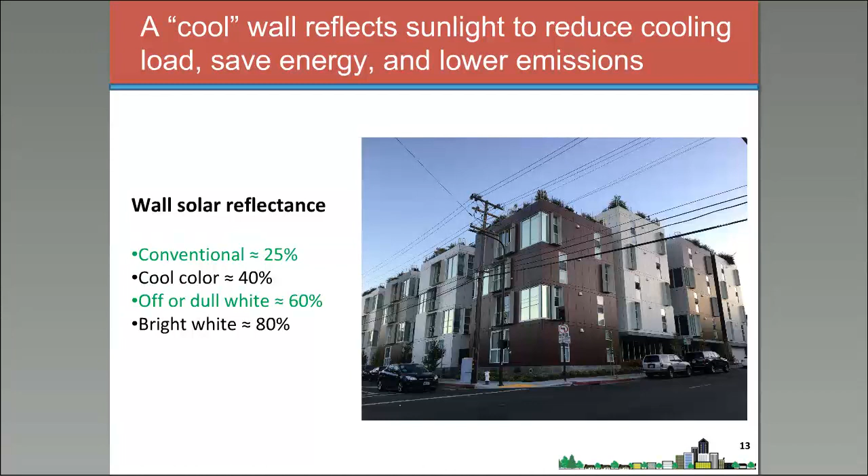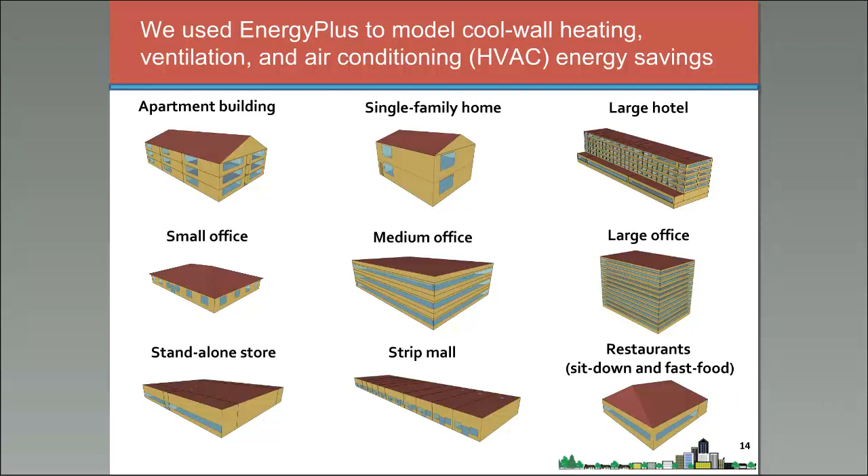We modeled the heating, ventilation, and air conditioning (HVAC) energy savings that could be attained by upgrading to a cool wall from a conventional wall using the building simulation tool EnergyPlus. We considered 10 different building categories, including homes—single family or multifamily—offices of different sizes, stores, standalone and in strip malls, and a couple of flavors of restaurants.

Using EnergyPlus, we evaluated the annual energy use, energy cost, and emission reductions attainable in each climate zone in California and across the United States. California is divided into 16 climate zones, and we considered 15 climate zones around the country. Here are little maps showing what these zones are.

What we found is that using cool walls will save energy and reduce CO2 emissions in homes, offices, and stores in all California climates and in U.S. climate zones 1 through 4.

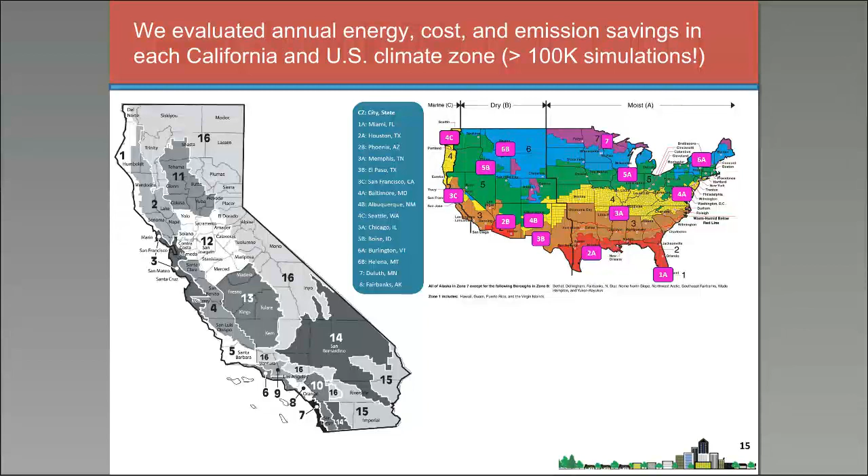Here's an example for a single-family home in Houston. I chose Houston because it's neither the hottest nor the coolest place where one would expect to see cool wall savings based on the previous simulations.

On the plot, I'm showing both the annual HVAC energy cost savings—that's heating, ventilation, and air conditioning, considering what happens across the entire year—and also the annual HVAC CO2 savings.

If you have a single-family home in Houston, Texas, and it's new construction, conforming with the 2012 energy efficiency standards, the latest in effect in Texas, then you would save about $58 a year.

If you had an older home built in the 1980s, according to the standards in effect at that time, you would save $74 a year. And if you had a home built before 1980, the oldest vintage, you're saving $129 a year.

That's a theme we see throughout the simulations done across California and the United States: savings in these pre-1980 homes are typically over twice that in new homes. That's because the older homes simply don't have as much insulation.

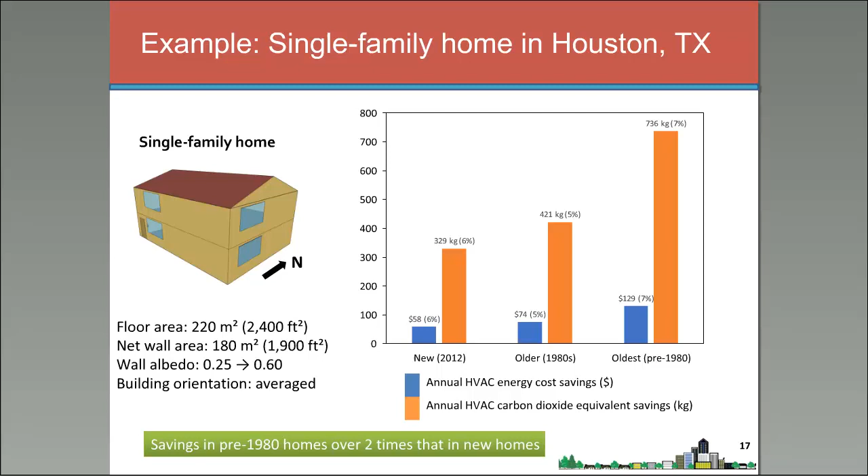This is important because if you look at the median year of construction of residential or commercial buildings in California or across the United States, it's in the 1970s, meaning over half of the buildings in our country were built before 1980, before the advent of modern building energy efficiency standards.

Now I'm going to address a few questions that might have come to mind. The first is: what if it's a wall that I'm making cool, but perhaps my wall is shaded, so it wasn't in full sun? How does that affect the savings I would attain?

You can scale the savings shown in the previous slides by what I call a solar availability factor. This is the ratio of the sunlight that strikes a wall, after considering the effect of neighboring buildings, to the sunlight that would be incident on the wall if the building were isolated.

Here's an example: if I have a single-family home—that's the central building shown in red—and it has neighbors.

It has a neighbor to the east across the street, a neighbor to the west across a pair of backyards, and neighbors to the north and south across narrow side yards.

What I do is look at the ratio of the height of these buildings to the separation between them, which yields what we call an aspect ratio. I've drawn some aspect ratios at the bottom of the slide in the lower left corner.

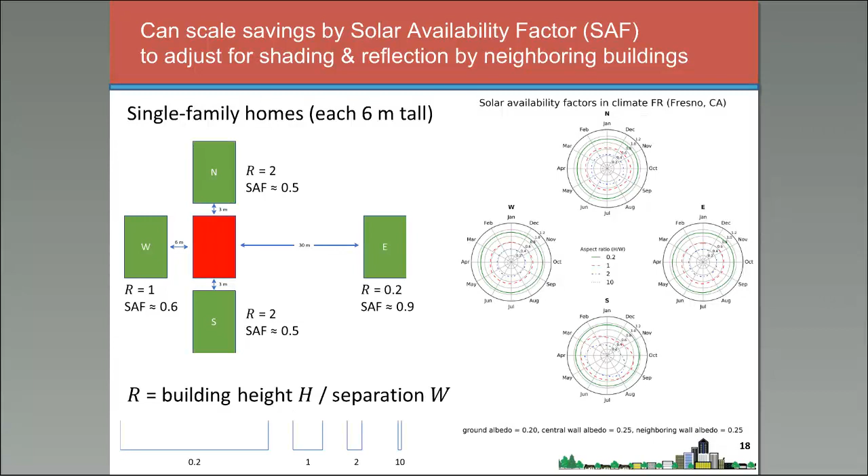The aspect ratio would be 0.2 for the building far to the east, 1 for the building closer to the west, and 2 for the buildings quite close to the north and south. I can then evaluate, based on the location of the building—for example, this building here in Fresno, California—and the month of year, the solar availability factor. My multipliers in this case are 0.9 for the east building, 0.6 for the west building, and 0.5 for the north and south buildings.

Another question you might ask is, can I get a cool wall product today? And the answer is yes. Here I'm showing measurements we have made on a variety of wall products that we're testing outdoors. I'll arbitrarily say a lower tier cool wall is one that reflects at least 40% and less than 60% of sunlight, and a higher tier cool wall reflects in excess of 60%. You can see there are products in perfectly acceptable colors sold today.

I'll also quickly mention that the group on top are all made with conventional pigments—ordinary things you'd find sold in, say, a paint store. The ones on the bottom use spectrally selective pigments, a slightly more advanced technology, but one that's been used for roofing materials commercially for decades, and in certain applications since the 1950s.

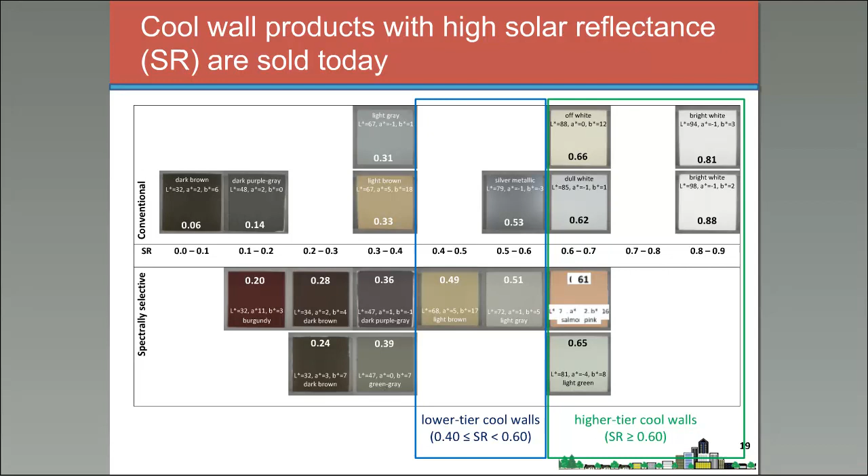A final question you might ask is: since we know roof products tend to get dirty and become less reflective over time, what happens to wall products? We'd like to know the answer too, so we've been conducting campaigns of product exposure.

We've been exposing products at 3 sites across California and at another 3 sites across the United States. We have roughly 50 to 70 products being exposed in each campaign, for 2 years across California and for 5 years at the U.S. sites. The California campaign will conclude this spring, and the U.S. campaign has about another 3.5 years to go.

Here's what we've learned so far. If you take a wall product and expose it vertically in Berkeley, Los Angeles, or Fresno, or take similar products and expose them vertically in Arizona, Florida, or Ohio, at most—after 15 months in California or 12 months in the U.S.—the reflectance has decreased by 5 points out of a maximum possible 100. That's a pretty modest loss.

If we were talking about roofing products instead, over a similar time period, the reflectance loss might be 10 to 20 points. Furthermore, the really high reflectance losses are observed only for materials that were bright white to begin with. For a dull white material, whose initial solar reflectance might be around 60%, those losses are perhaps 2 to 3 points. In short, wall products so far do not appear to get particularly dirty.

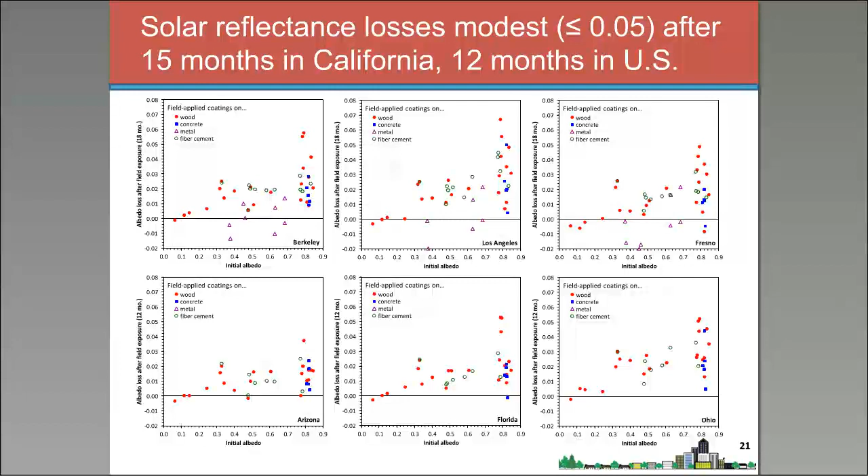So if you installed a cool wall product that had a high solar reflectance to begin with, it's likely to retain that high solar reflectance. And that's my introduction to cool walls and the energy saving and greenhouse gas reduction benefits.

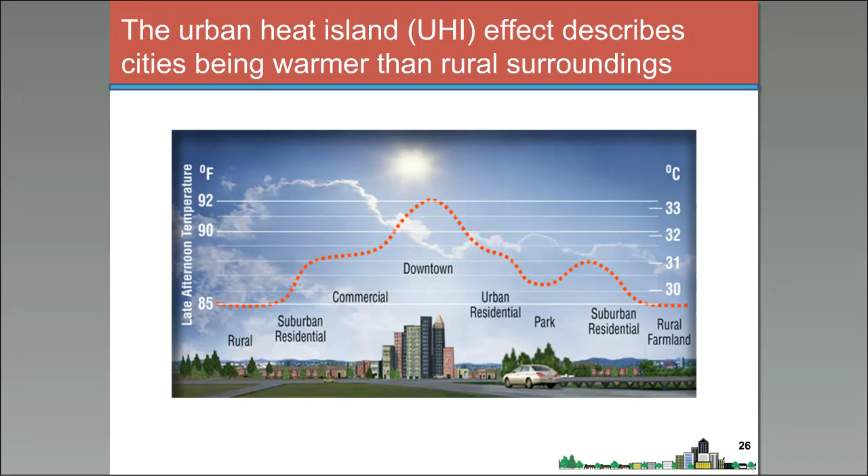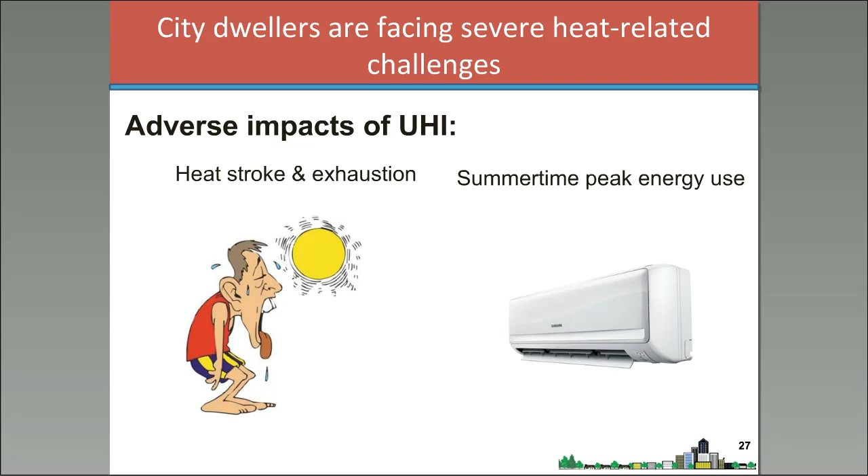Everybody on this call knows what the urban heat island is, but I'll spend 10 seconds defining it just in case. The urban heat island is a phenomenon describing where cities are warmer than their rural surroundings, and it causes various heat-related challenges including heat stroke and exhaustion, increases in summertime energy use, air pollution issues, and more.

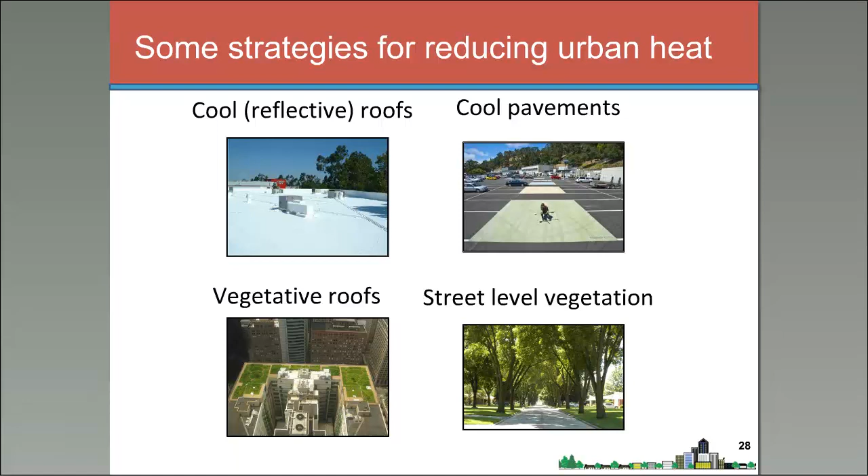Cities are considering various options for reducing urban heat islands, including solar reflective cool roofs, cool pavements, and vegetation at roof level and street level. As already mentioned, solar reflective cool walls are a topic that hasn't been studied as extensively as the others. I'm going to talk quite a bit about solar reflectance and albedo, which in this context I'm using to mean the same thing, so I'll quickly define it.

The albedo we're defining here as the ratio of reflected to incident sunlight. So the highest albedo attainable would be 1, meaning reflecting all incoming sunlight, and the lowest would be an albedo of 0, meaning absorbing all incoming sunlight. These have not yet been systematically investigated, so that's what we're doing in this work.

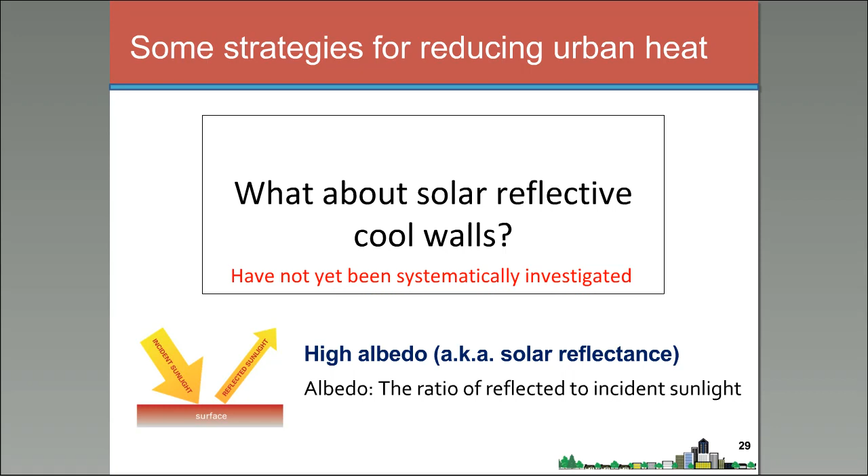Our research goals were to quantify the climate effects of hypothetical widespread cool wall adoption in the Los Angeles basin - basically trying to bound the maximum possible impact of cool walls, assuming all buildings adopt them. We look at increases in reflected sunlight out of the city of LA after adopting cool walls, and the consequent air temperature reductions in urban canyons. We thought this would be a nice opportunity to compare the climate effects of cool walls to cool roofs using a consistent modeling framework, so that's part of this work too.

To do this, we use a modified version of a regional climate model called WRF, the Weather Research and Forecasting Model. We made various modifications to the model to investigate this problem more accurately, which I don't have time to go into. The model includes formulations to account for the effects of urban canyons on radiation transfer, for example the way buildings shade the ground and the way sunlight can get trapped in urban canyons. Urban canyons are basically the space between buildings, that U-shaped cavity between buildings.

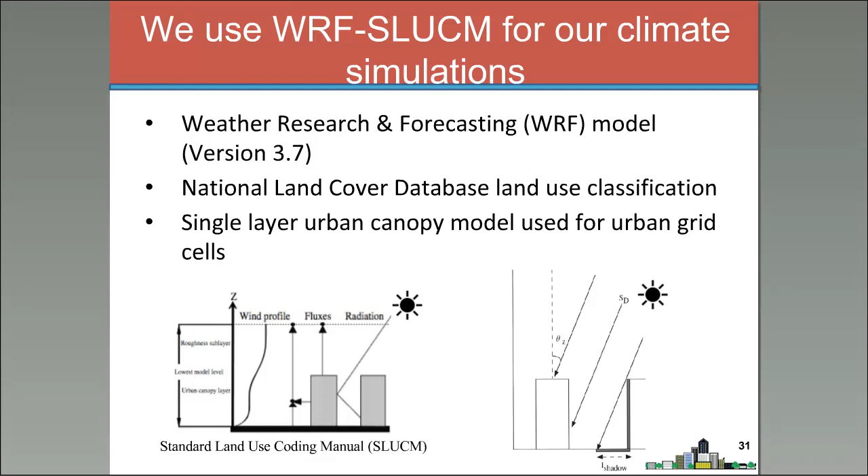So for this investigation, the modeling we did was focusing on Southern California. You can see the figure on the left, the red square there is our highest resolution nested domain for the modeling.

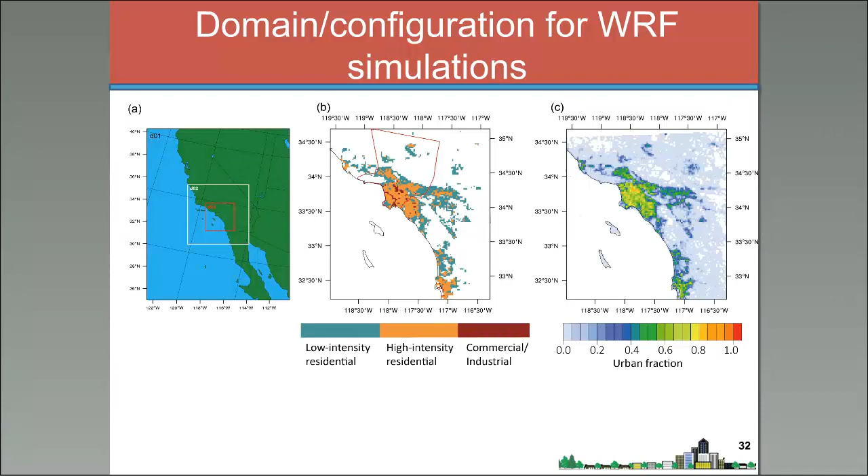It was simulated at 2 kilometers, and as you telescope out to the larger areas, those are simulated at lower resolution. In the middle and right figures, you can see a couple of the data sets we use to describe the variations in land cover in the Los Angeles basin, essentially looking at the fraction of surfaces in the urban area that are impervious surfaces as opposed to pervious vegetative surfaces and soil surfaces.

One thing that was very important for this project, to accurately quantify the effects of cool walls, was to get a realistic sense of the urban morphology, so basically looking at building heights, wall areas, the width of urban canyons, meaning the space between buildings, and things like that.

To do so, we used a data set called LARIAC, the Los Angeles Region Imagery Acquisition Consortium. It's basically a highly accurate three-dimensional building footprint data set that shows footprints and height for each building. We also used another street centerline data set, and we're able to characterize the morphology or geometry of various buildings around the basin.

So we did a bunch of different scenarios. The first one is a control scenario where we assume low albedo for walls and roofs, and the idea here is to look at the sensitivity of the climate of the LA basin to increases in wall albedo. We can then use those sensitivities to scale our results to whatever wall albedo increase is of interest.

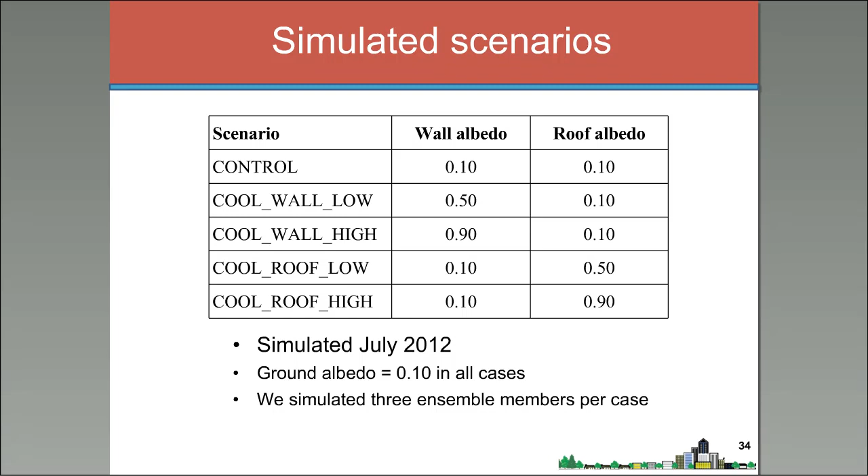We did simulations for cool roofs with equivalent albedo increases to be able to compare and contrast the climate impacts of those things. The results we're looking at are for summer, July of 2012, so we're basically modeling the climate as it was for July 2012, and then doing perturbation scenarios where we see, okay, what if July 2012 was the same, but all walls had an albedo of 0.5, and in an extreme case, to completely bound the system, what if all walls had extremely high albedo of 0.9, etc.

The basic point here is to show that walls are unique because they're vertical surfaces, so you get larger albedo increases in the morning and in the evening. It has to do with the way the sun is lower, and the sun sees more wall in the morning than it does when the sun is overhead.

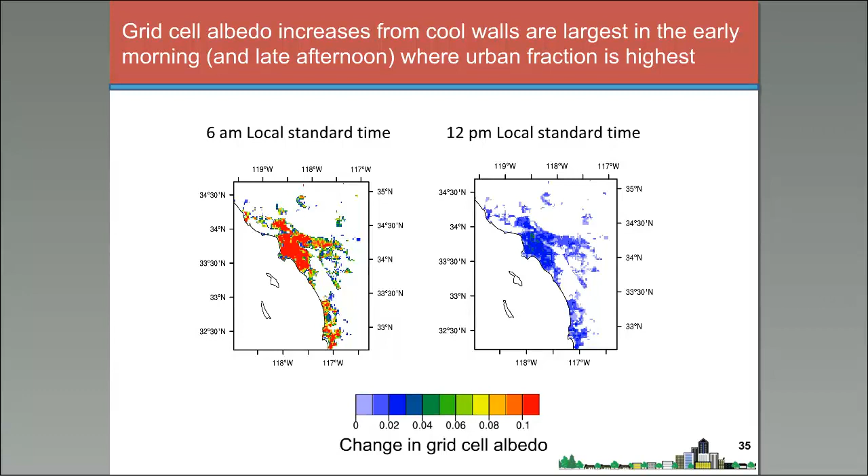At noon, and so you can see the figure on the left for 6 a.m. has more red colors, which means a larger bird's eye view albedo increase in the morning and in the evening, although that's not shown. This figure here shows the diurnal cycle, basically the evolution of albedo increase throughout the day.

For the two cool wall adoption scenarios we looked at, we're comparing it to cool roof scenarios, which are the two green lines. Because roofs are horizontal surfaces, the bird's eye view increase from cool roofs is constant throughout the day, whereas for walls, there's this diurnal cycle.

Again, you can see when you look at the blue lines that the albedo increase from the bird's eye view is higher in the morning and in the evening. You can see that for a constant albedo increase, compare, for example, the solid blue line to the solid green line, those are the same albedo increases for roofs and walls. In the early morning and late afternoon, the blue line is higher than the green line, so the bird's eye view albedo increase is larger for cool walls than for cool roofs.

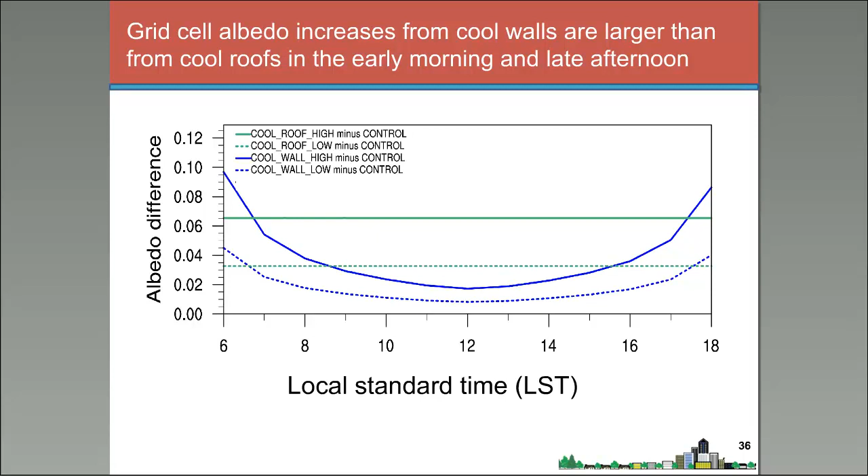But then for most of the day, the albedo increase from the bird's eye view is larger for cool roofs than for cool walls.

What really controls the climate impacts are a few things listed here. One has to do with how much sunlight ends up being reflected out of the urban area. For walls, this introduces a new complication, because sunlight reflected from walls doesn't necessarily make it out of the urban canyon like it does for roofs.

With roofs as a horizontal surface, almost all the reflected sunlight makes it out of the urban system. For walls, roughly half of the sunlight gets absorbed within the urban canopy itself. So to think through how cool walls affect climate, we need to consider that solar irradiance on walls is about 40% of that on roofs for July in LA County, because walls are vertical rather than horizontal.

But on the other hand, there's actually more wall area than roof area. The net wall area is about 60% larger than that for roof area.

The third point is that solar radiation reflected by walls is partially absorbed by opposing walls and pavements. So if you think about the daily cumulative increase in sunlight reflected out of the urban area, cool walls don't have as high a daily cumulative increase. At the bottom, for the cool wall high scenario, there's about 780 kilojoules per meter squared that makes it out of the urban area, which is about 43% of that for cool roofs. So a portion of it gets trapped in the urban area.

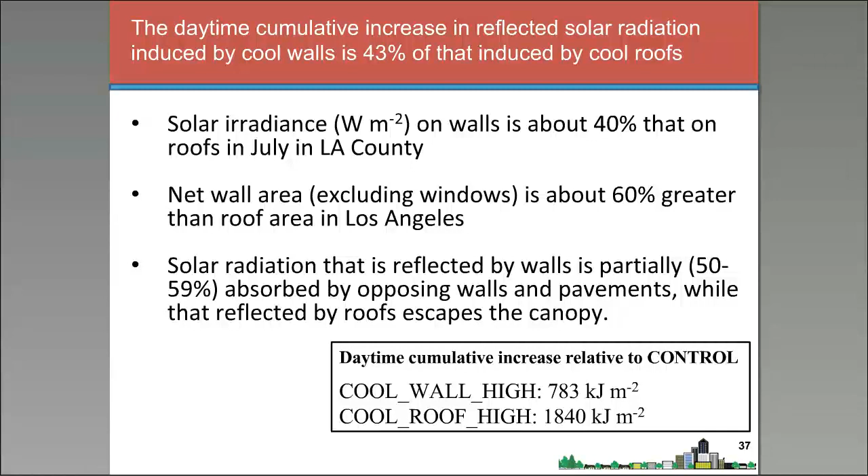When you look at the climate impacts, this shows the change in canyon air temperature, a new diagnostic variable for this model, which looks at air temperature within the canyon rather than at the top. What you can see here is the temperature change caused by cool wall adoption at two times a day: in the afternoon, roughly the hottest time of day, and in the evening, when many cities have their maximum urban heat island effect. You can see temperature reductions up to roughly half a degree Kelvin or Celsius.

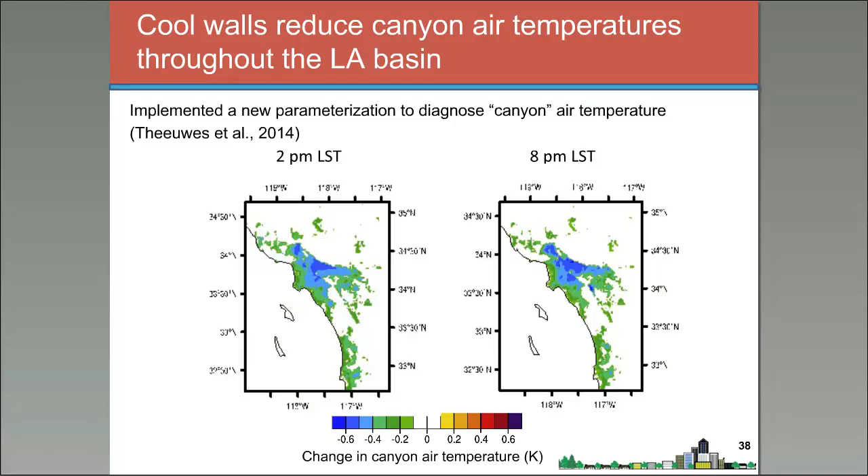As you move to the east side of the basin, you get more cooling. That relates to the onshore sea breeze in the LA basin, so the climate impacts of cool walls accumulate as you move east, as the winds move air from west to east.

This figure compares cool roofs to cool walls. First look at the solid blue line, for the maximum case of really high albedo cool walls. You can see there are two peaks in temperature reduction: the first at 9 a.m. and the second at 1800 hours, or 6 p.m. That shape of the diurnal cycle is somewhat complex, and I don't have time to go into it fully.

It has to do with the diurnal cycle in the amount of radiation a wall sees, which is higher in the morning and evening than at noon. It also relates to some atmospheric dynamics I won't get into right now. If you compare that to the solid green line, the climate impact of adopting cool roofs with the same albedo increase, you can see the peak temperature reduction is a bit larger than for cool walls, and it comes a little later in the day.

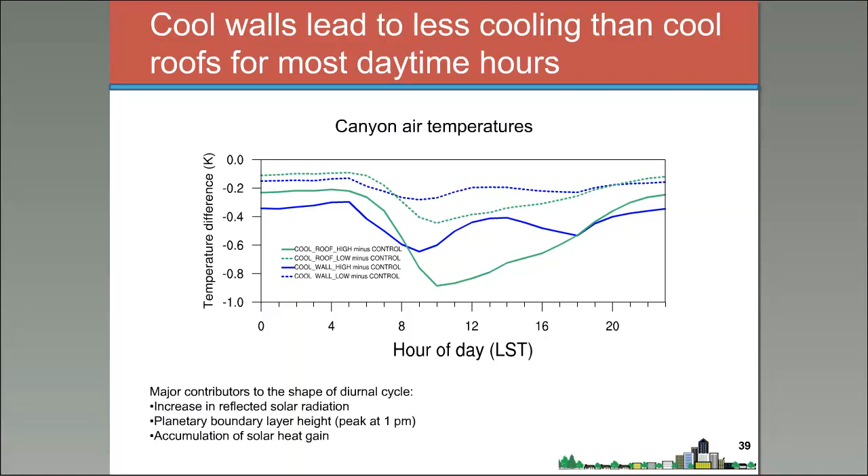This table summarizes daily average temperature reduction per facet albedo increase. The takeaway is that daily average temperature reductions are pretty similar for cool walls and cool roofs. As an example, look at the second and fourth rows, comparing the climate impacts of really high albedo cool walls and really high albedo cool roofs. Per 0.1 albedo increase, the temperature reductions are relatively similar.

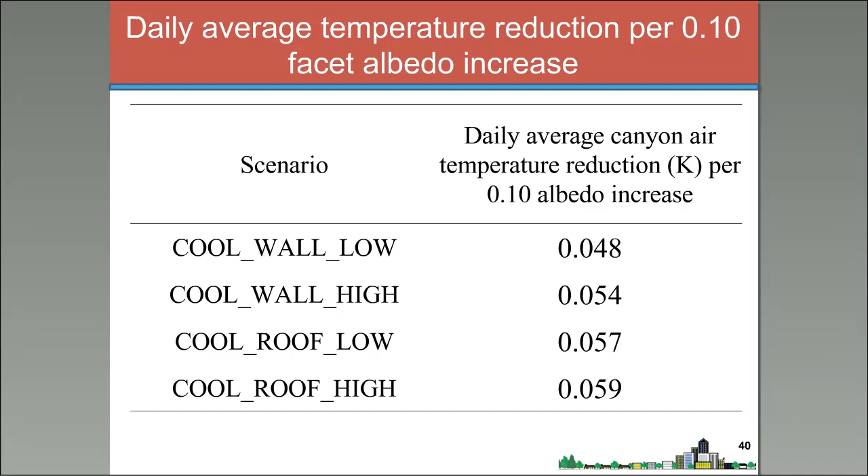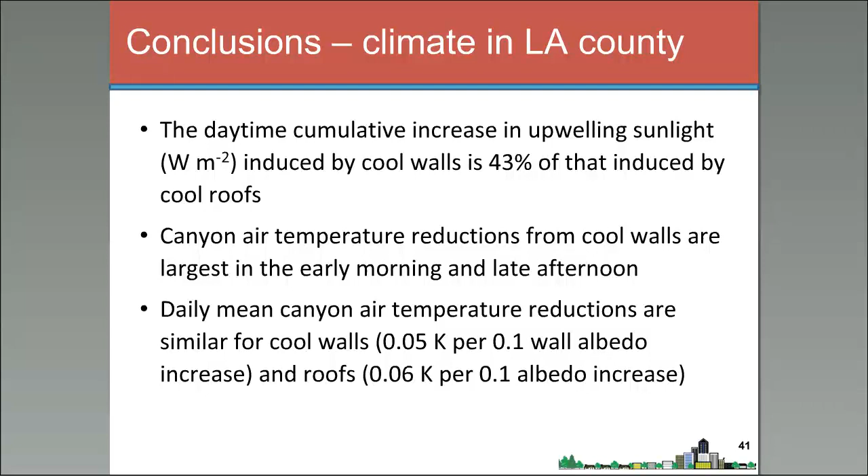0.05 versus 0.059. So in conclusion, we found that daytime cumulative increase in upwelling sunlight induced by cool walls is about 43% of that of cool roofs. Canyon air temperature reductions from cool walls are largest in the early morning and late afternoon. Daily mean canyon air temperature reductions are similar for cool walls and cool roofs when viewed from a per facet albedo increase perspective.

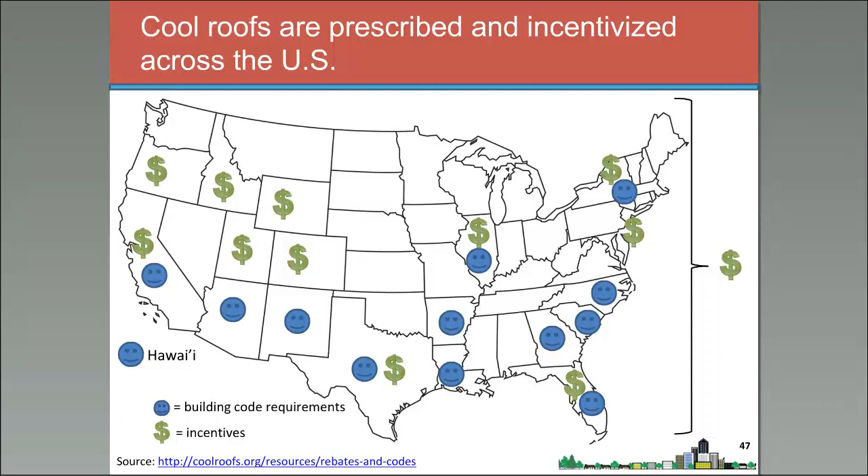Based on that poll, it seems like many of you are familiar with cool roofs, and many of you have actually taken steps to implement or adopt cool roofs in your jurisdiction. That is similar to what we found when we look at cool roofs across the U.S. We find them prescribed and incentivized across the U.S. in many states and cities, and that's kind of what this graphic is demonstrating. And so the cool roof model has been very successful.

So when we thought about how to advance the adoption of cool walls, we thought, let's replicate this cool roof model. To do that, we set out to do a couple of things. One is to create some guidelines to help building owners and communities understand the appropriate adoption and implementation of cool walls, as Ronnen kind of outlined in his initial presentation. What are the benefits? We also wanted to look to develop language for building codes, green building programs, and incentives, which can help further the adoption, and also investigate the feasibility of a cool wall rating program or system.

Cool walls, it was kind of exciting to find, are actually referenced already in many codes, standards, and green building programs. I bet many of you are familiar or have heard of ASHRAE. There's ASHRAE 90.1, which is a standard for non-residential buildings; we find cool wall measures in ASHRAE 90.1. We also find them in ASHRAE's 189.1, which is the green building standard that they have developed.

We also find cool wall measures in California's Green Building Code. They have a set of measures that are mandatory, and then they have a set of voluntary measures, which includes cool walls that local jurisdictions can adopt to go beyond code. And that's where we find cool walls. We also found them in the state of Hawaii, and we'll hear more from Howard about that later, and also in the National Green Building Rating Program, Green Globes.

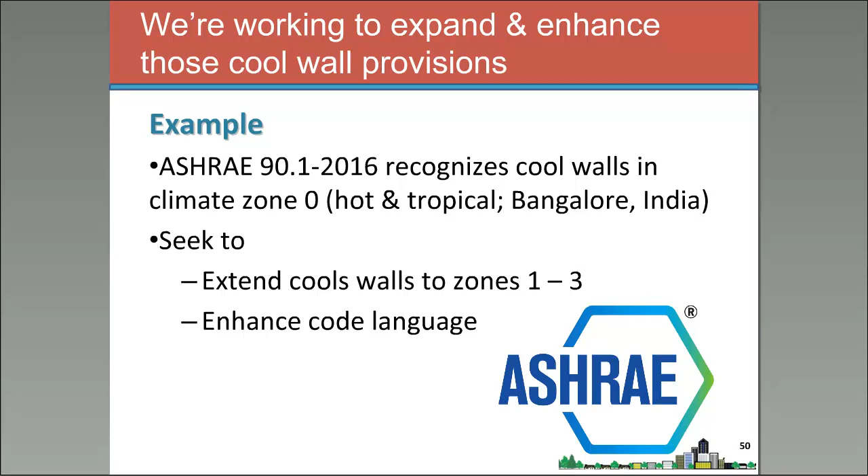While we found cool wall measures in many different existing building codes and standards, there are still other key programs we're trying to introduce cool wall measures into, such as the U.S. Green Building Council's LEED program. Dr. Levinson is working on submitting a pilot credit for LEED, under the Heat Island Reduction Credit.

We're also working with the California Energy Commission to see if we can introduce cool wall measures into the Building Energy Efficiency Standards, commonly referred to in California as Title 24. And it's also important to target residential buildings. While ASHRAE 90.1 is widely used and adopted, it's for non-residential buildings. So we hope to also work with IECC to include cool wall measures, which would be helpful for increasing adoption in the residential market.

In addition to these building codes and standards and mandatory avenues for advancing adoption, we also want to investigate and advance incentives.

One of the incentives we found in California is PACE programs, Property Assessed Clean Energy programs, which provide innovative financing to homeowners and building owners to fund energy efficient retrofits. If a product is listed on the eligible product list, the owner of the building can use this financing to fund the installation and cost of material.

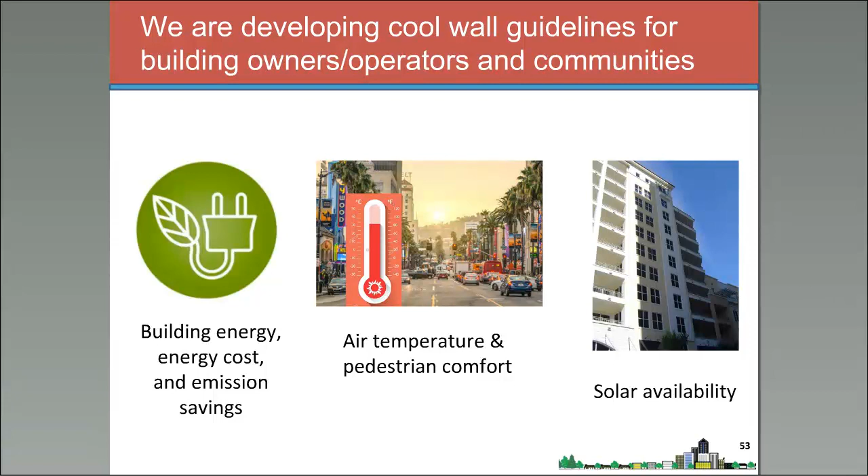There's details on the building energy costs and emission savings. There's also more information on solar availability and running those calculations for your area. And then there's a summary of what George presented as well, the air temperature and pedestrian comfort benefits that we found.

And lastly, one of the key things that we hope to do through this effort is to establish a cool wall product rating system. We found that this was key to advancing cool roof adoption because it provided credible methods to evaluate and label cool roof products so they could be included in these building codes and incentive programs. It's also this independent rating system that gives confidence to the measures found in building codes.

We hope to model this program on existing successful rating programs like the Cool Roof Rating Council or the National Fenestration Rating Council. We're also in talks with at least the Cool Roof Rating Council to see if we might be able to expand their scope to also include cool wall products.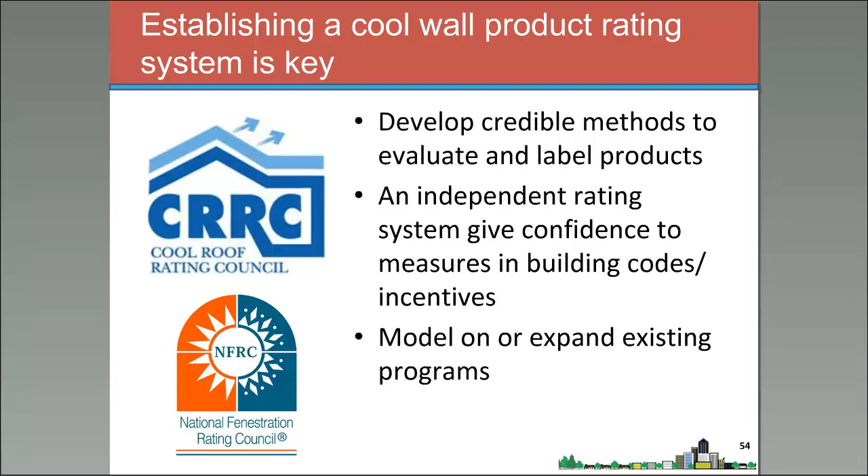So I've talked about some of the things that the research group as well as a working group of stakeholders will be working on, but there are some easy things that you all in local jurisdictions can do now to consider the adoption of cool walls.

For example, you can see if you have access to PACE program financing or other rebates through local utilities to incentivize the use of cool walls. You can also take the lead for your state and include cool wall measures in your local municipal building code.

Here's an example in Los Angeles. They have the City of Los Angeles Green Building Code, and they've actually adopted a mandatory cool roof requirement. It's not cool wall yet, but they were able to do that at the local level, and it exceeds what was required at the state level. So local jurisdictions can adopt measures that are not included at the state or national level to exceed those programs.

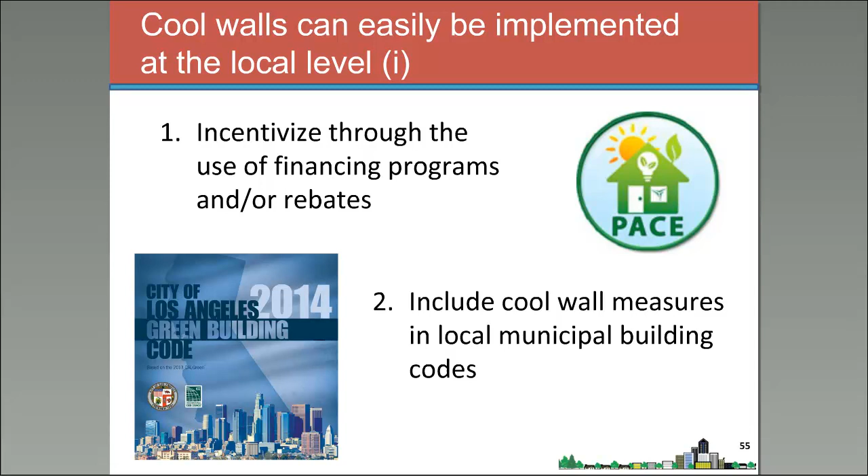You can also lead by example by working within your own portfolio of buildings, municipal or state-owned buildings. We have a beautiful example here of Los Angeles City Hall. I think this is historically an important color that they've selected. It's the building itself, but it is a beautiful, cool color, we have to say.

You can also think of ways to feature information on cool walls and targeted communications for residents and businesses. For example, in spring and summer, you might send out tips or post on Twitter and Facebook to help people as we're coming into the hot, extreme heat season. You also might think of ways to include cool walls in programs for weatherization or low-income household retrofits. Those are sometimes already existing.

Cool walls is really one of the easy strategies that you can do to retrofit your building to make it more energy efficient in warm climates. It's pretty low tech and easy to apply, so I think it's a real good win-win for those types of programs.

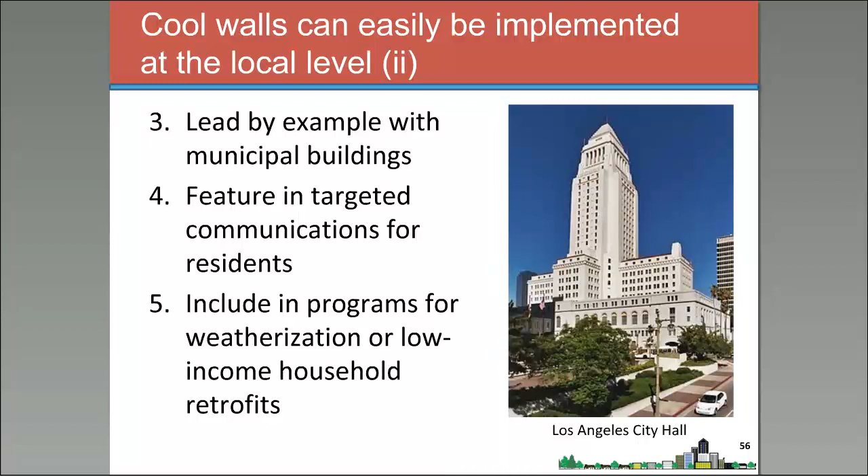I'd like to recognize that the research team has been key in this, but we've also throughout this project had the participation of several key industry manufacturers and building code stakeholders that have helped advance this component of the research, and that will help us continue to work on this topic after this project to be sure that we have appropriate adoption of cool walls. So thank you again, Victoria. I think that concludes my slides.

Great. Thanks, Haley. That was really interesting. There are a lot of things in there that I did not know as far as what has been done for cool walls. It's encouraging, and I think some of the ideas you have for other codes, standards, and ratings would be a great way to keep advancing cool wall implementation. So I'm looking forward to working with you on that and seeing how it all pans out.

So let's get to our friend from Hawaii who's going to talk about what they have done as far as research on cool walls and trying to put cool walls into the state's energy code, and also working with national level energy code standards.

Our speaker today is Howard Wiig. He's an energy analyst with the State Energy Office, State of Hawaii. He's been involved with developing building energy codes tailored to Hawaii's unique climate for over 30 years. He has been an active participant at the national level in energy code hearings that have formulated the International Energy Conservation Code and also the National Green Building Standard. Howard was recently instrumental in adding a new climate zone, the tropical zone, applying specifically to Hawaii to the 2015 iterations of those two codes I just mentioned. And as a result, they were able to subsequently incorporate cool walls into the state energy code in Hawaii. So aloha, Howard. I will turn it over to you.

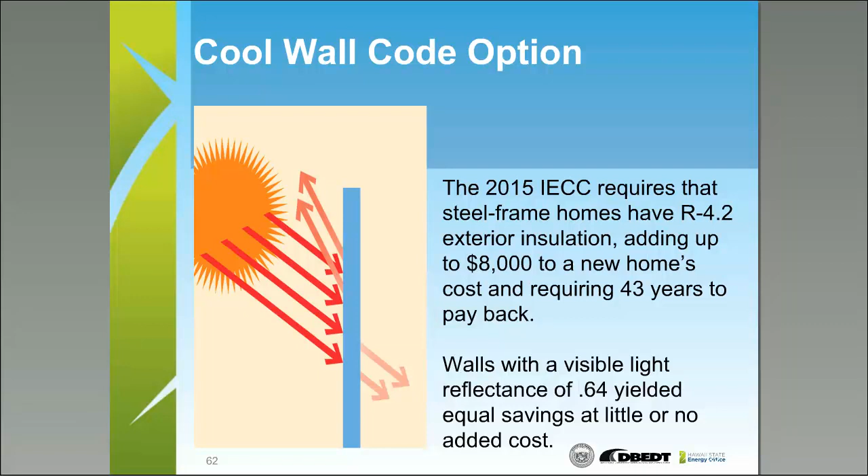I like to do hands-on measurements myself. I thought it'd be very scientific. I was at a friend's house on the north shore of Oahu, overlooking the big wave country, and had my heat gun with me. The afternoon sun was beating directly on this wall, so I shot dark green, full sun, 165 degrees.

Then right next to it was a shaded area, also dark green, which went down to 115 degrees. Delta, 50 degrees F, not bad. Then I went to a light-colored wall right next to the dark surface and got 125 degrees. Delta, 40 degrees. This is the difference that a change in light or color can make.

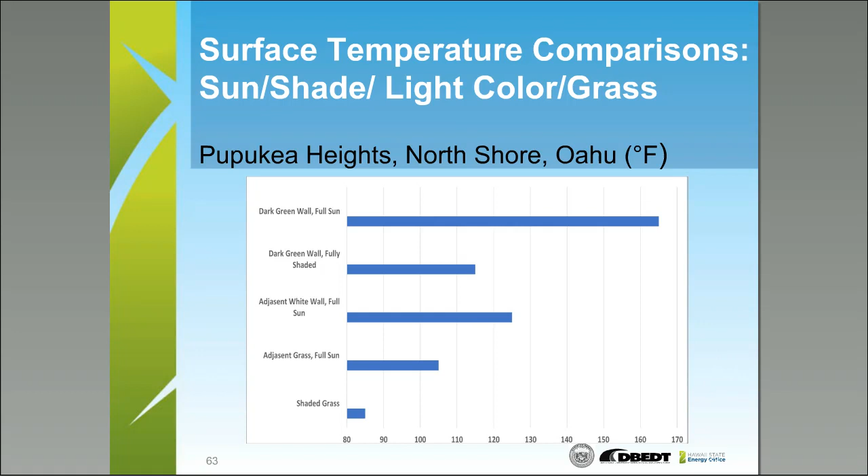And just to round out the ecosystem, I shot full sun grass right underneath this, 105 degrees, shaded grass, 85 degrees. So this is a teeny little microsystem with these great variations in temperature based on the conditions you subject it to. Then to do another little real-world experiment...

I was contacted by the parents of kids at Laie Elementary, which is also on the North Shore. A lot of Hawaii buildings, my house included, are single wall construction, and it was hot in the classroom. So we went out, and it was kind of late in the morning, and measured the interior temperature at 88.3 F.

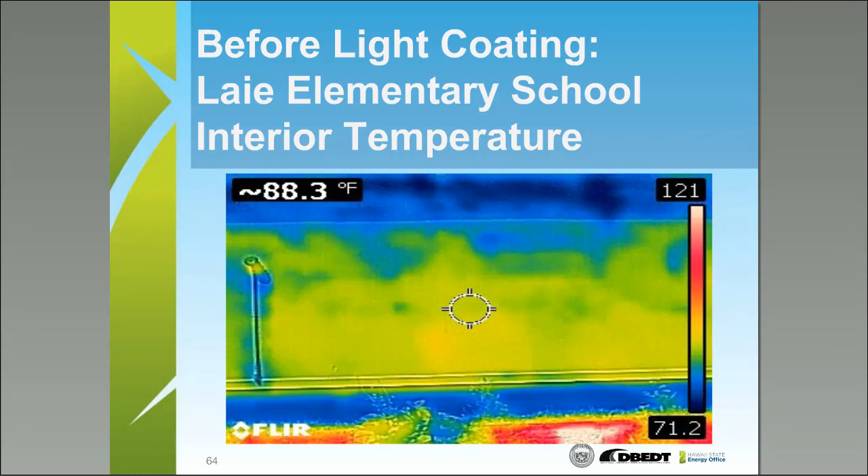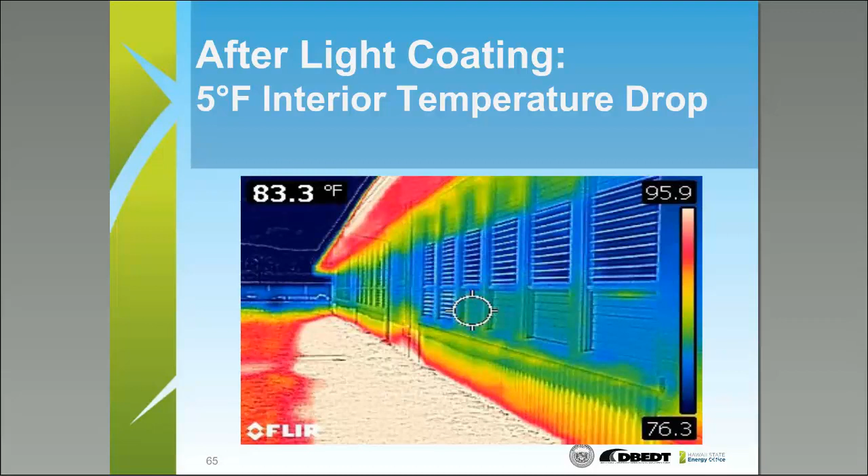Then, under supervision, the kids and the parents coated what had been a dark green surface with a very light green surface. When the paint dried, we shot interior temperatures, and it was lowered by 5 degrees F. Keep in mind this was later in the day, but that made a great deal of difference, just that little experiment.

But going to a more formal type of research, Dr. Przemyslaw Dera of the Hawaii Institute of Geophysics has been experimenting a lot and written very academic papers on TiO2, and he was excited enough by our project to include us in a grant application he's writing to the National Science Foundation. Ideally a grad student will be available to us this summer to conduct a whole lot of experiments, and I solicit ideas for experiments from you.

And finally, I have questions myself. Should shading be added to our calculations? You've seen what difference it makes. The reason the paint manufacturers didn't want to go to solar reflectance was I talked about TiO2, and they said, oh, that'll add to the cost. So I would like to see studies of how much TiO2 adds to the cost of, say, a gallon of paint versus the reflective effects of that.

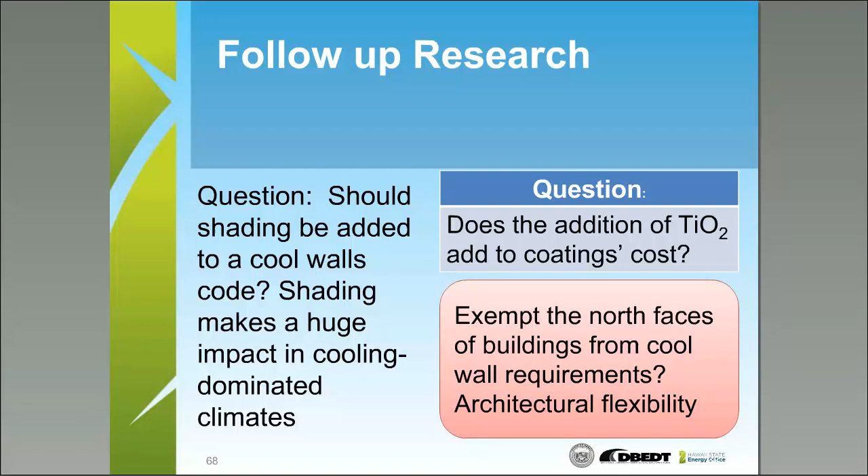And then finally, to give architects flexibility, should we exempt the north face of homes or buildings from the cool wall requirements? That does it for me. Mucho mahalos, which is Hawaiian for thank you very much.

Thank you, Howard. Learned some Hawaiian today. That's great. Thanks for your presentation and for all the work you've done there. It's really interesting to see some of the on-the-ground realities of how these things get done, and I think your advice will hopefully help some people on the line.